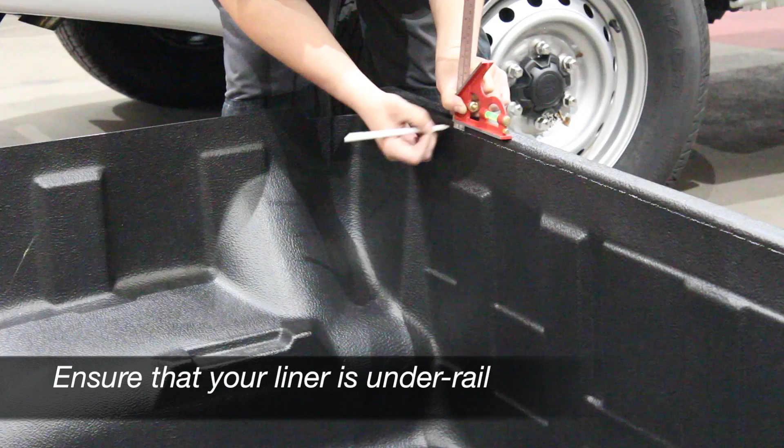First, check that your bed liner is under rail. If you have an over-rail liner, we recommend that you either swap it for an under-rail liner or modify your existing liner to avoid uneven surfaces and potential leaking. Remove the packaging and check your hardtop over carefully.

Locate the fitting kit. Your fitting kit will include the wiring harness kit, 6 clamp blocks, a neoprene strip, a roll of protective tape, the spare hardtop keys, cable ties and wire connectors.

In order to fit your Truckman Grand, you will need 17mm and 10mm spanners or sockets, a torque wrench, a drill driver, a circuit tester or multimeter, silicone sealant, water spray and a squeegee, and pliers or wire cutters.

Next, temporarily open the hardtop windows and remove the protective wrapping. Then, thoroughly vacuum the lining of the hardtop and clean the vehicle's rear window.

Fill any gaps between the front and side rails with a silicone sealant. Apply the self-adhesive neoprene strip to the bulkhead rail to ensure an even surface.

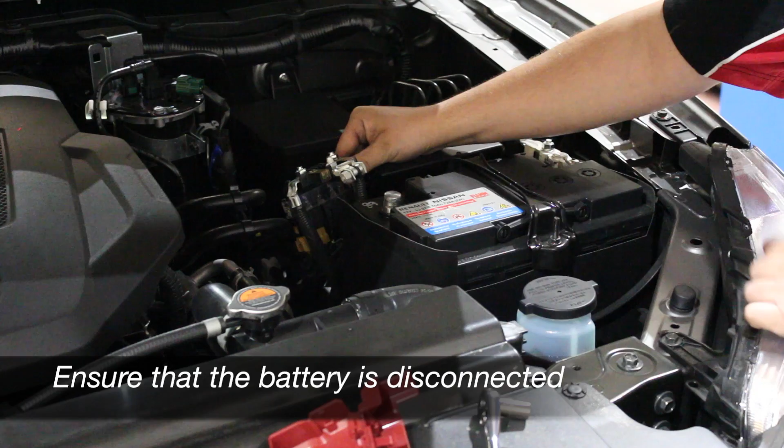Disconnect the battery. Remove the rear side right light cluster, disconnect it and set the unit aside.

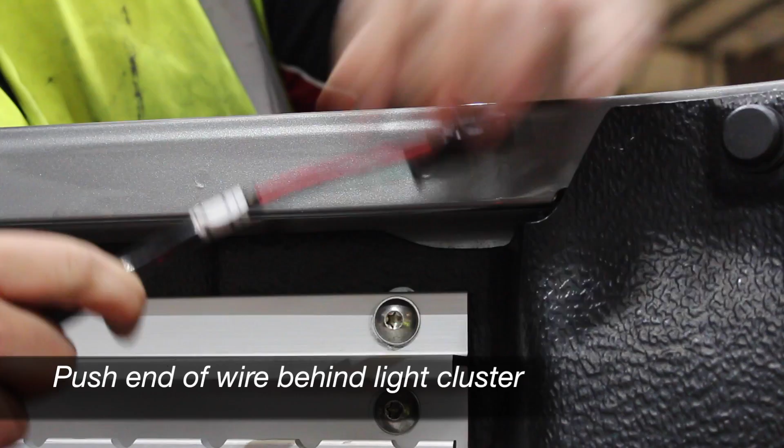Unwrap the wiring harness and pass the end with the 2 connectors through the small gap under the side rail at the rear. Draw the harness through the light recess and leave about 10 cm of cable inside the load bed.

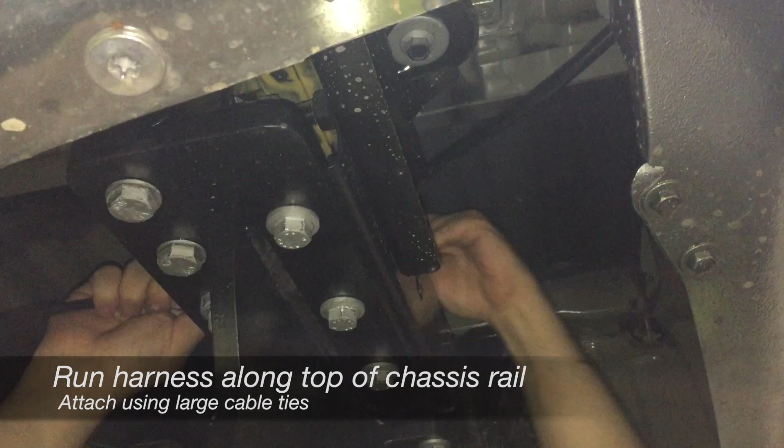Pass the wires under the wheel arch. Feed the harness down the chassis following the vehicle's wiring loom. Run the harness along the chassis rail and attach using the large cable ties.

Then, fasten the harness along the Navara's wiring loom on the side of the chassis rail with the small cable ties.

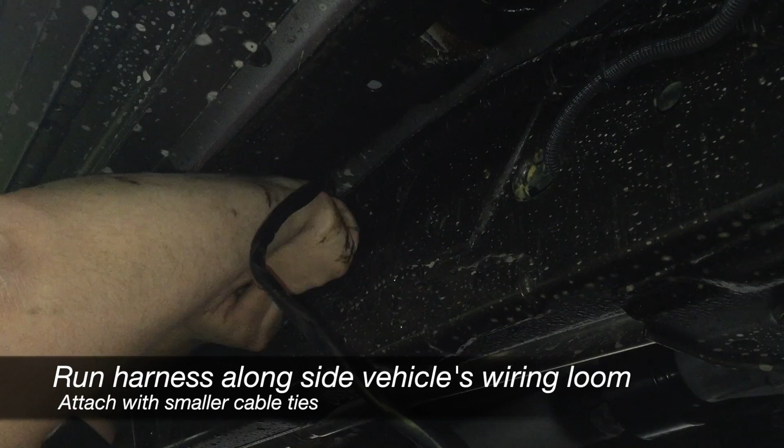Remove the driver's door sill cover and side kick panel. Peel back the carpet and soundproofing to locate the grommet to the right of the accelerator pedal.

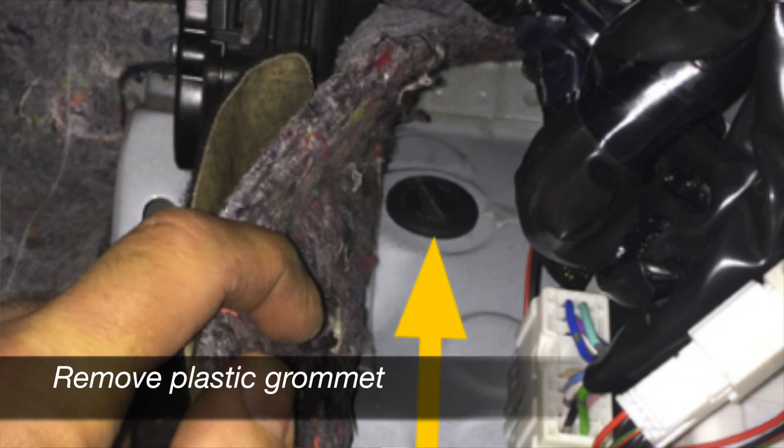Make a small hole in the grommet and then replace it. At this point, you need to pass the leg of the harness containing the green, yellow, grey, brown and blue wires through the hole in the grommet into the driver's footwell.

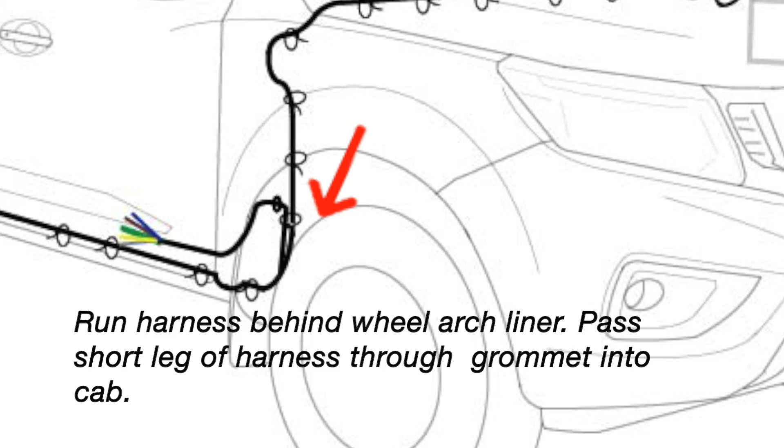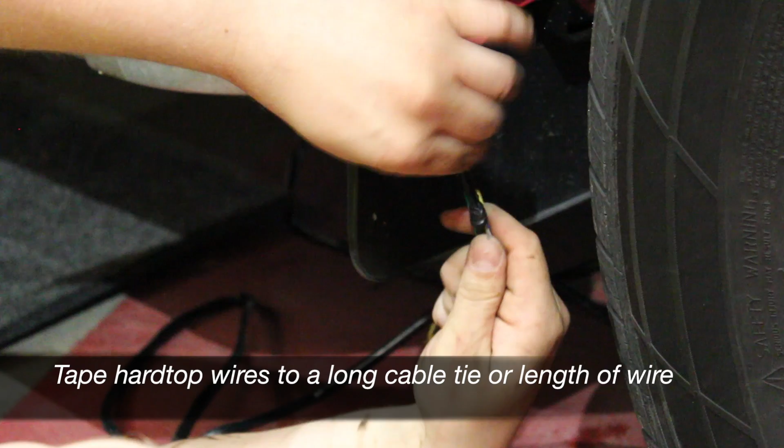A tip for doing this more easily is to use a length of wire or a long cable tie as a draw cord. Pass this draw cord through the hole and attach it to the hardtop's harness using tape. Gently pull the draw cord through into the footwell and then discard it.

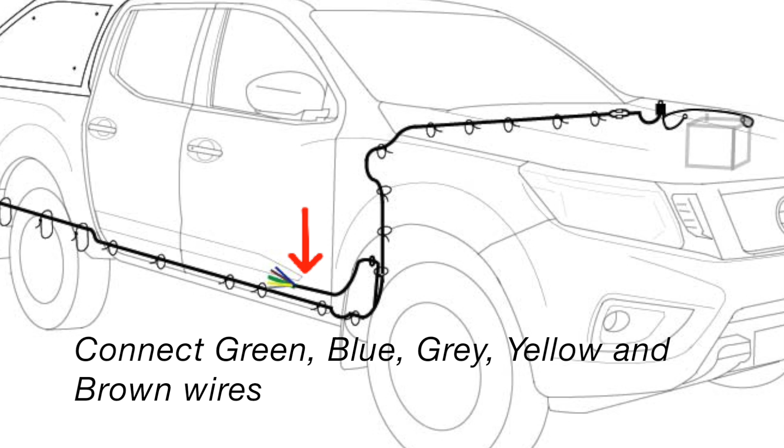At this point, you need to connect the hardtop's coloured wires to the vehicle's wires. Either solder the wires together or use the connectors provided. Open the white plastic cover and expose the wires.

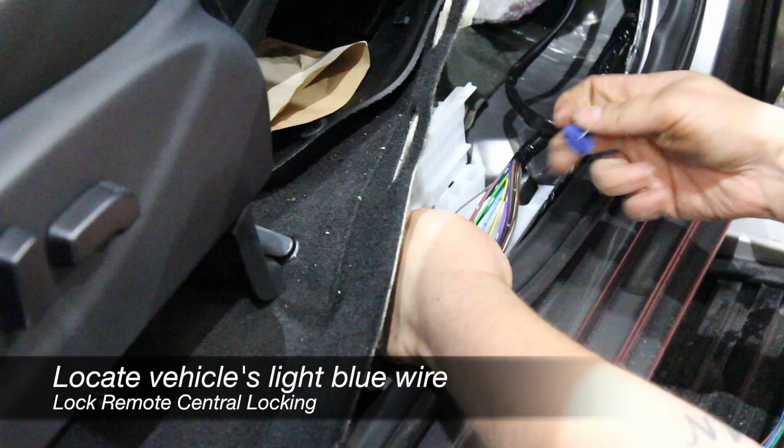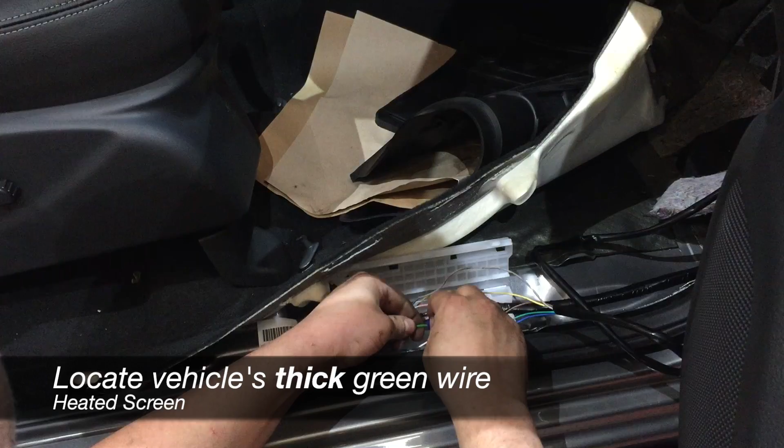For the remote central locking, locate the vehicle's light blue wire and connect it to the hardtop's grey wire. For the heated rear screen, locate the vehicle's thick green wire and connect it to the hardtop's green wire.

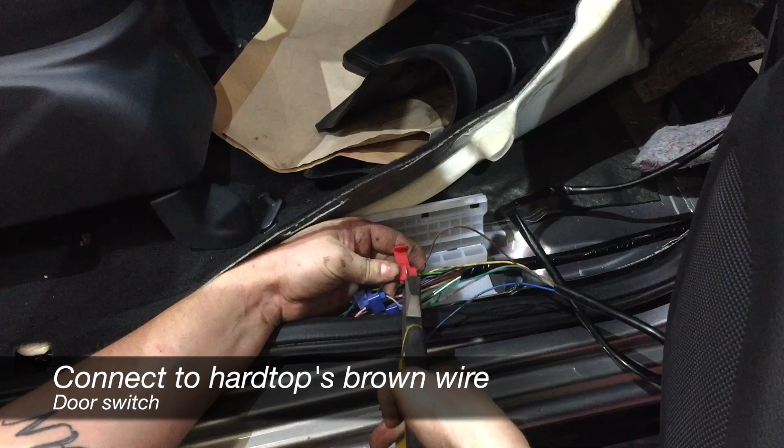For the door switch, locate the vehicle's thin green wire and connect it to the hardtop's brown wire. For the hardtop's high-level brake light, find the vehicle's white wire and connect it to the Truckman's blue wire.

Cut the white wire to disconnect the vehicle's third brake light. Fold and insulate the end of the wire with tape. Replace the kick panel, carpet and door sill.

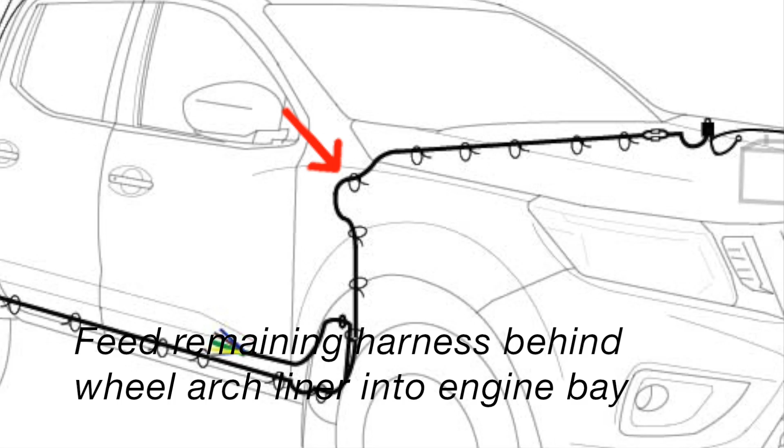Feed the remaining harness behind the wheel arch liner into the engine bay following the vehicle's wiring loom. Ensure that you avoid the steering column.

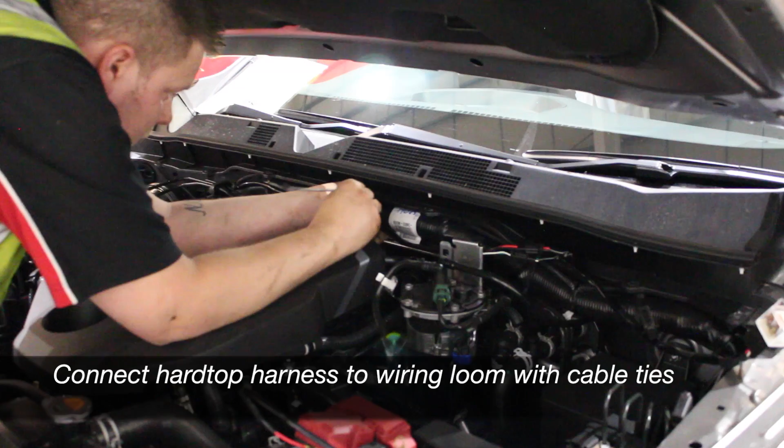Follow the vehicle's wiring loom across the rear of the engine bay and attach to the hardtop's harness using cable ties. Now connect the joining parts of the harness and cable tie to the vehicle's wiring loom.

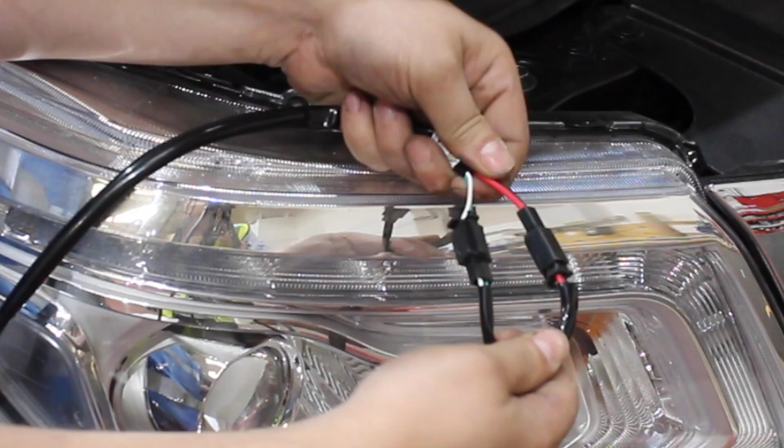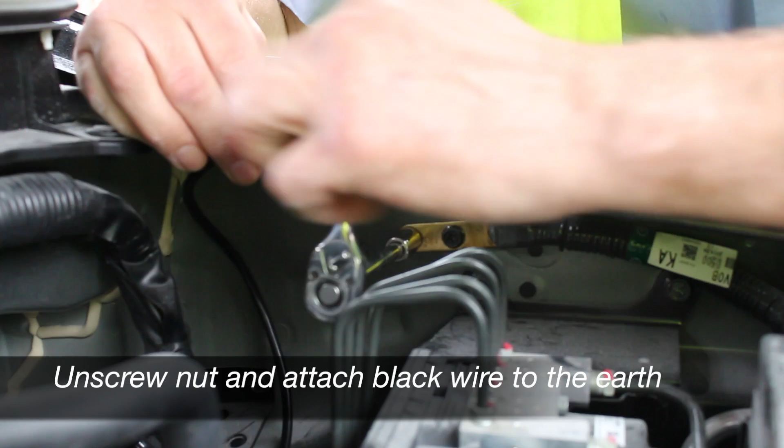Connect the negative black wire to the body earth point. Connect the red wire to the positive battery terminal.

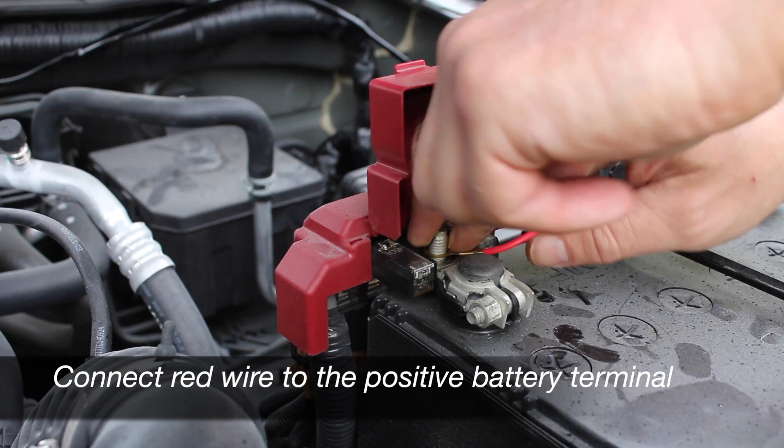Replace the rear light and thoroughly clean the rear edge of the vehicle's tailgate. Then spray it with water.

Unroll the protective tape and peel away a little of the backing paper. Carefully apply the tape where the door seal touches. Use a squeegee to remove any bubbles.

Lift the hardtop onto the vehicle. This is heavy lifting, so we recommend 4 people assisting with the lifting of the top.

Ensure a good gap between the hardtop and the vehicle cab. Check the hardtop is central on the vehicle bed and that it lines up correctly. The rubber seal on the bottom of the door should just be in contact with the tailgate spoiler.

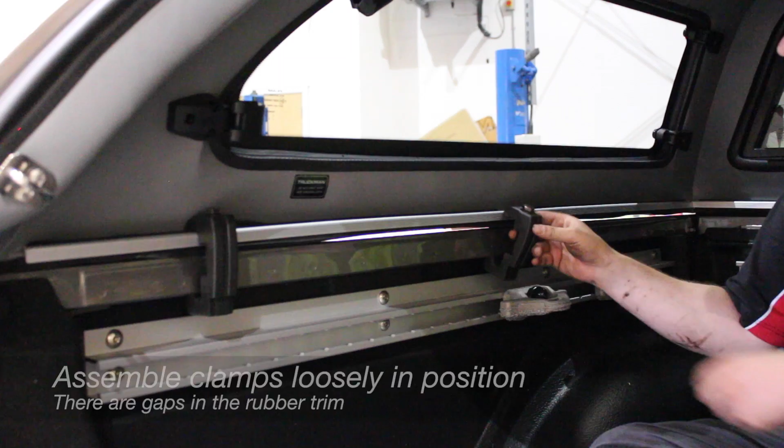Find the gaps in the rubber trim and assemble the clamps loosely in position on the side rails. Tighten the clamps to 8 Nm. Start with the rear clamps, then the front clamps, and finally tighten the centre clamps. Any gaps between the hardtop and the vehicle bed will close.

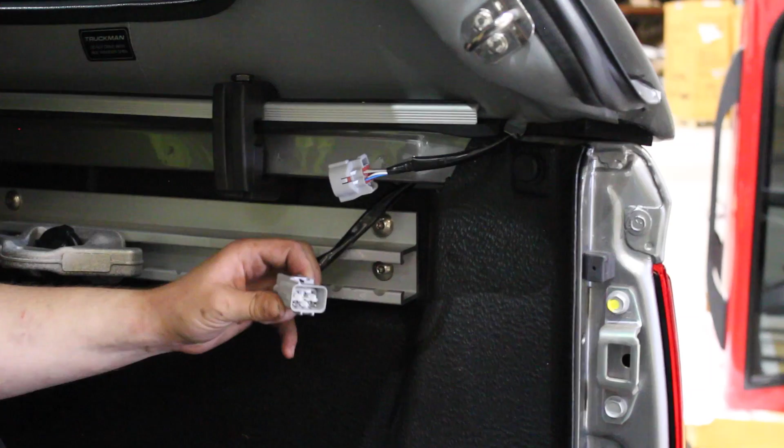Connect the hardtop loom and the hardtop harness together and reconnect the vehicle's battery. Finally, check that the electrics are working correctly. Check the hardtop's brake light and automatic interior light.

Switch on your vehicle's heated rear screen and check that there is positive 12 volts across the element on the hardtop door. Close all of the doors and check that the canopy locks and unlocks with the vehicle's remote.

This completes your installation of the Truckman Grand Luxury Hardtop. Again, we recommend that the auto electrics are only carried out by those competent in this field. Please read the supplied fitting instructions carefully.